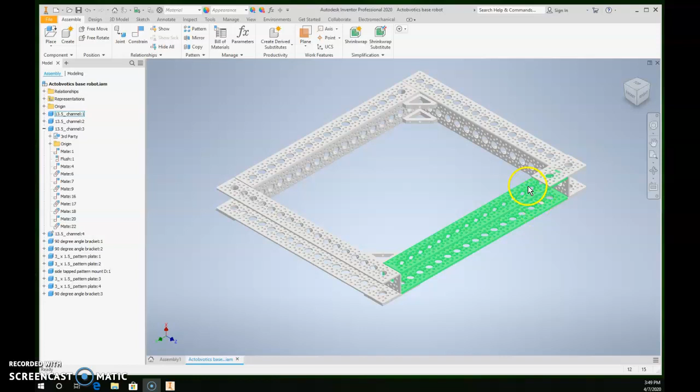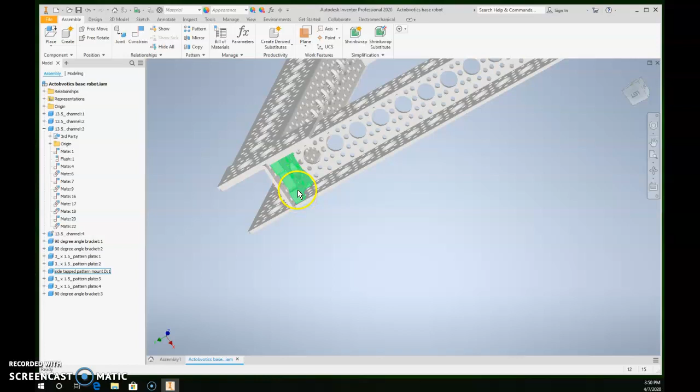Okay, so this is where we should have left our robot last time, with all the different brackets in the corners. You should have had two ways connecting each corner. For example, here I had two corner brackets. Here on this one I had two plates, a plate on top and a plate on the bottom. Over here I had a plate, and if I spin it around, I had one of those inside couplers, inside connectors, end connectors I guess. And on this side I had a plate and an angle bracket. I think I mentioned, plate and the coupler, or the end plate there. So that's the way I connected my corners. You could have done it a variety of different ways after I showed you those first couple.

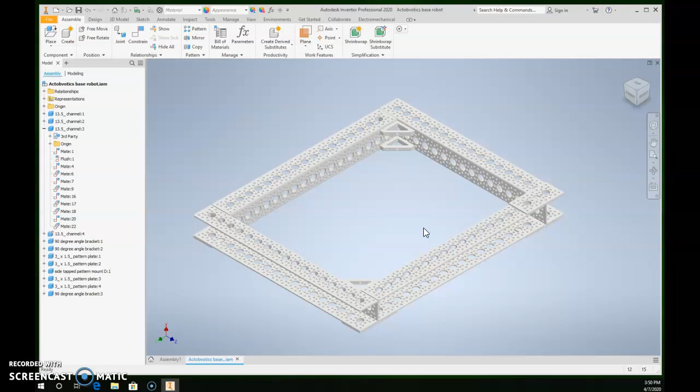All right, what we're going to do this time now is we're going to try to get some wheels on this thing. Hopefully we have time in this 15-minute video to get all of our wheels on. We'll just see what we get done.

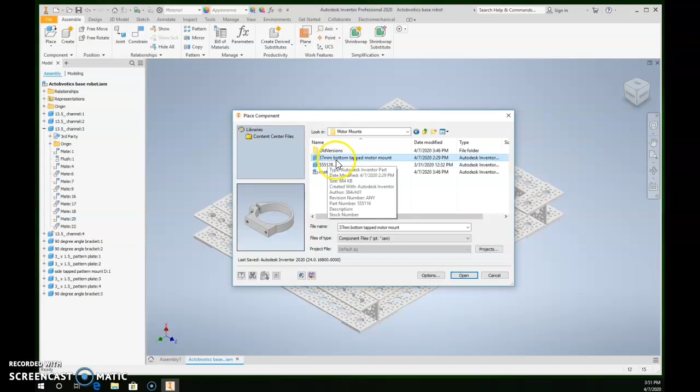So first, we're going to go to place, and under place we're first going to place some motor mounts. This robot we're going to create is going to be a two-wheel drive robot, so we're going to need some motors and some motor mounts. So we're going to go motor mounts. The motor mount we're going to use is this one, the 37mm bottom tapped motor mount. So we're going to place in two of those, one there and one there, that's fine.

While we're doing it, we're going to need some motors, so we're going to place in some motors. We're going to use the NeveRest motors, so we're going to place in two of those.

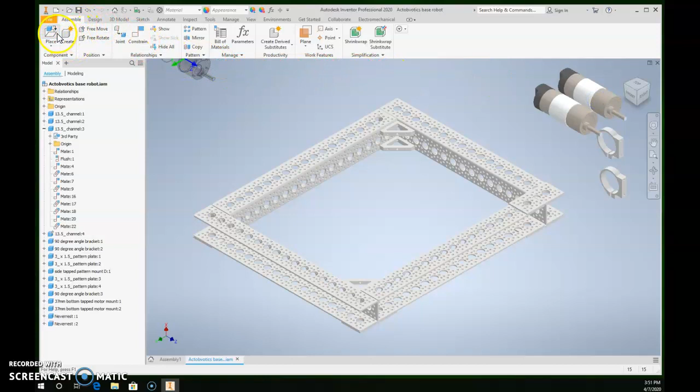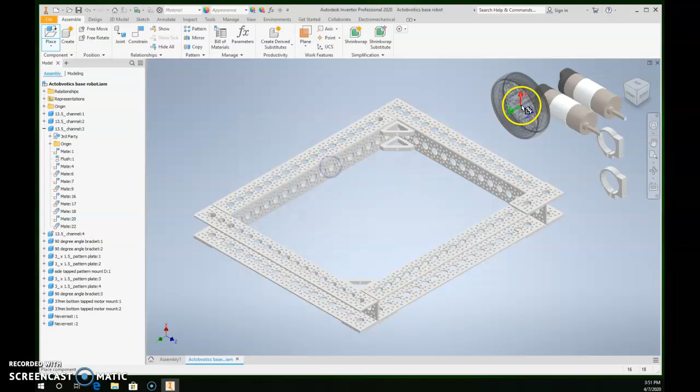While we're doing it, we also need some wheels, so we're going to go ahead and place in some wheels. I'm going to scroll down to the wheels folder. They have these two parts of the wheels you can put together, but there's also one that's already assembled together, called a sub-assembly. So we're just going to go ahead and place in this assembly, which will save you a couple steps. So we're going to go with that and place in two of those. All right, that's going to be enough to get us started at least a little bit.

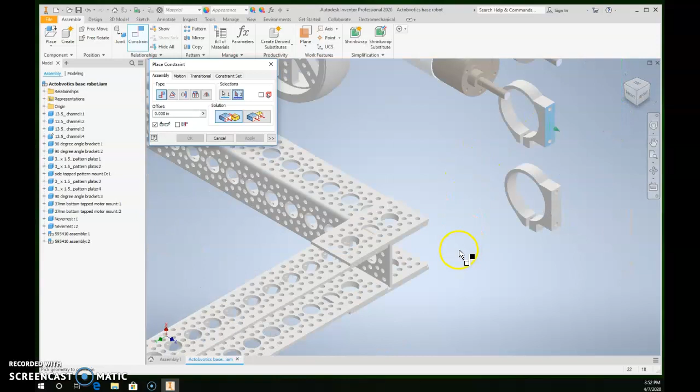So let's start putting some of these into place. First off, we're going to start with our motor mount. We're going to go constrain this bottom surface of the motor mount here. We're going to select it, and we're going to mount it on the bottom of our robot. So I'm going to flip this robot over, and now we're down here on the bottom of the robot.

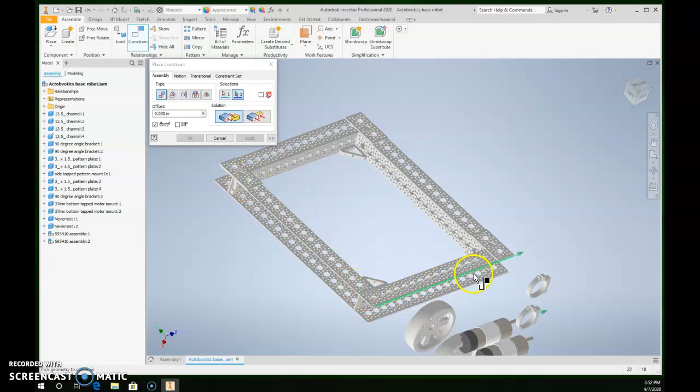Now here's where you have a decision to make. Notice the bottom of my robot. I happen to use, on three of the sides, this plate here on the bottom. We need all of our wheels to be mounted on the same surface, so mine, again, 3 out of the 4 have that plate on it. So I'm going to mount mine to a plate, my motor mount here. I do not have a plate here, so I am going to have to add a plate to this one once I get to it. So for now, though, to start, this is the motor mount I'm going to place. I'm going to place it right on top of this plate here, so it's going to go right to there, and I'm going to apply that.

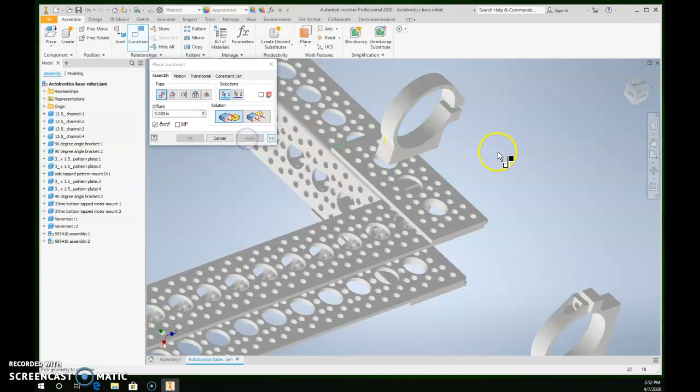Next, I'm going to move this off of that surface just a little bit, and I'm going to go ahead and constrain the center hole of that motor mount there. And I'm going to constrain it to the center line of that plate that I just mentioned I had on there. So constrain that there.

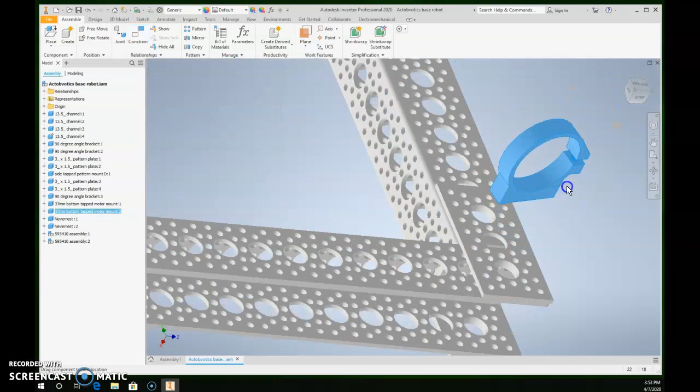So now my motor mount will rotate here. You do want to put them both the same direction - it really doesn't matter which direction you put it. Notice I have this tightening clamp here on it that holds your motor and clamps it in place. I have it in the back - this is the way I'm going to put it on this one. Or you can have it facing towards the front. However that is, but again, it has to be sitting flat on this plate.

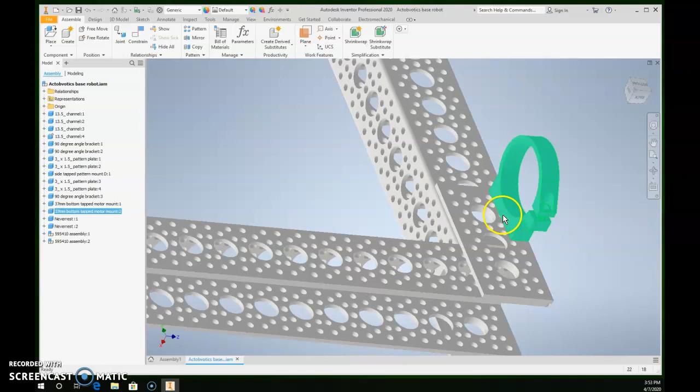Excuse me, it's not coronavirus.

Now I'm going to place this other part of the motor mount. I'm going to constrain this hole there and rotate this around, and I think it should line up with that hole. Yes, very good. So apply that. There's that motor mount put into place, and it's looking really good.

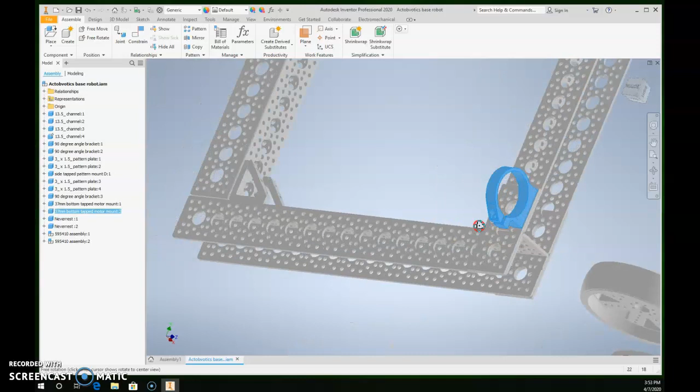As I mentioned, I decided to do even plates on all sides since I had plates on 3 out of 4 of the sides. So I'm going to add another plate here. If you decide to mount yours flat, that's okay, but if you get rid of any plates, you'll have to add in another brace, because each one of these corners has to be braced in 2 positions.

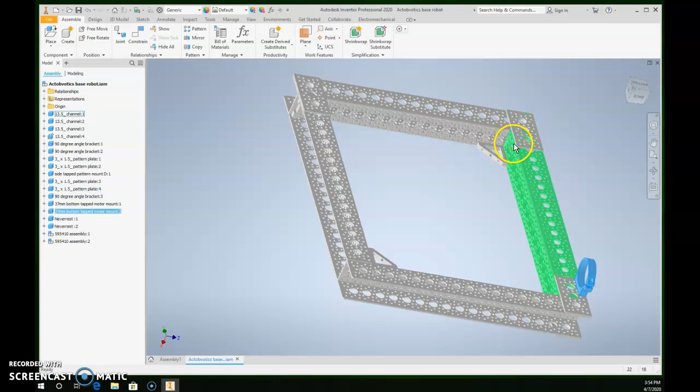I'm going to pause my video for a second and go ahead and get this other plate added here. I think you can handle that on your own.

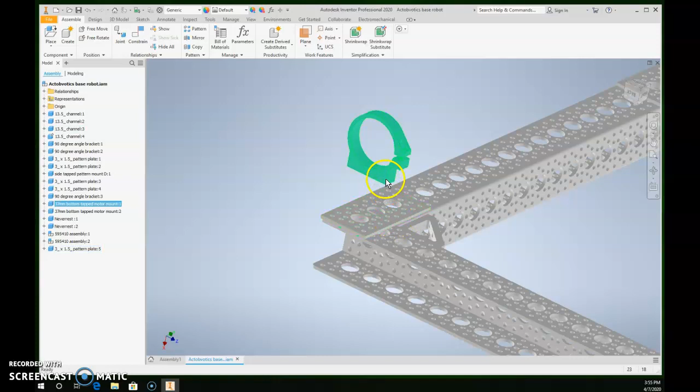So as you see, I'm on the other corner here. I went ahead and put this plate in there, just that normal little plate underneath of the brackets. I put one of those on, and I mated this to that surface. Now I'm going to finish constraining this piece.

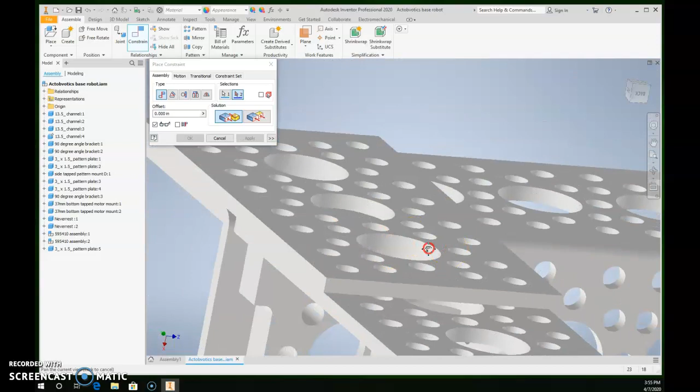I want to make it face in the same direction as this one, so the hole on this end I want to constrain towards the front. I'm going to go to the center of that hole and constrain it - oh, I spun my whole thing around - and constrain it right up here to this front hole on that plate.

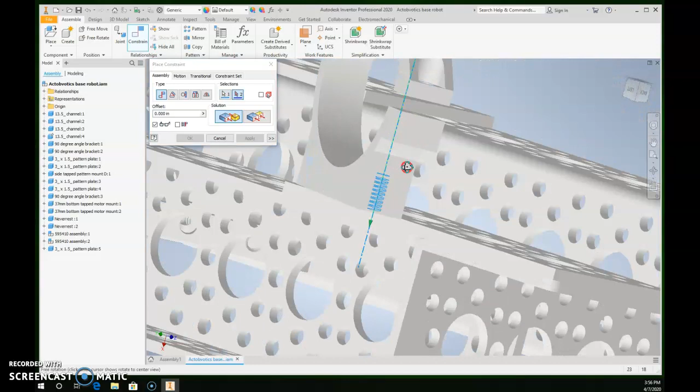Apply that. As I always do, it's easier to rotate this around so at least it's close. So I'm going to constrain here, go to the center of that hole, rotate it back around, put it right there to that hole, and apply that.

If I've done that all properly, these two little portions of it are towards the back, and that makes it look consistently the same.

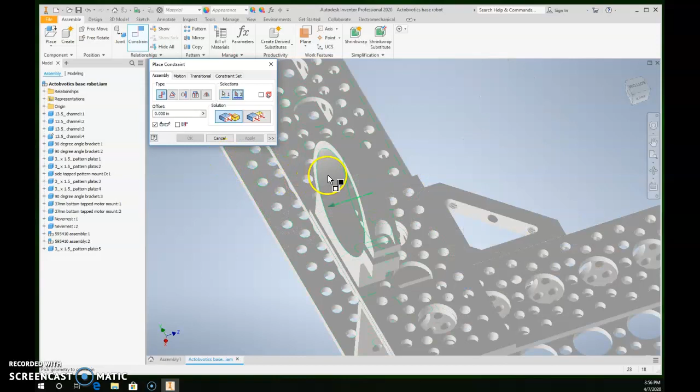Now we need to put our motors in there. I'm going to constrain, going to the center line of the motor - just click there - and then go to the motor mount and click on that surface to the center line of it, putting my motor in there.

Notice the shaft of this motor is sticking out this side. It's going to be hard to mount a wheel on the inside of it, so I need to make it go the other direction. I'll just click here, and that makes it spin the other direction. I'll go ahead and apply that.

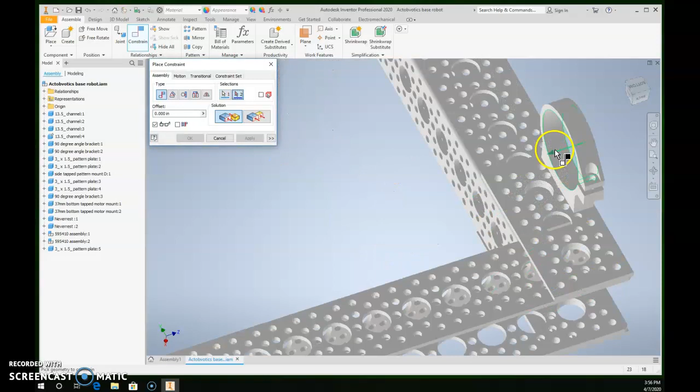I'm going to put my other motor in there, constrain this one to right there, and it's facing the right direction, so I'll go ahead and apply that.

Next, I want these motors sticking out the same, so I'm going to use flush. I'll come right to here and flush this surface of the motor with this surface of the motor mount.

However, I'm not going to leave it totally flush. Right here in this space, I'm going to use offset. I'll offset a 1/2 of an inch, so I'll go 0.5 and offset the 1/2 inch.

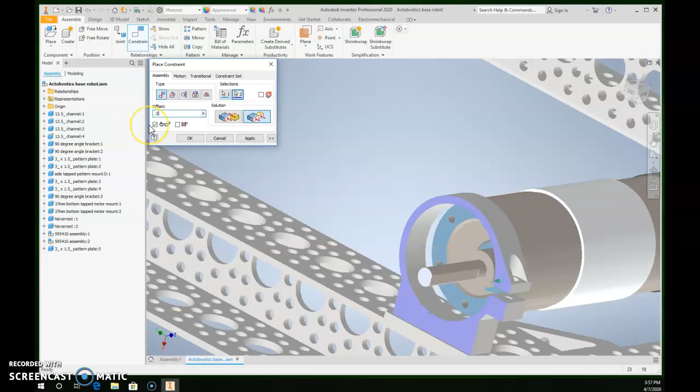Notice when I offset that 1/2 of an inch, it went in the way that I had mine selected. Yours may or may not have. If yours did go in, easy enough - you just change this to a negative, put a minus in front of that, and offset it minus 1/2 of an inch in this direction.

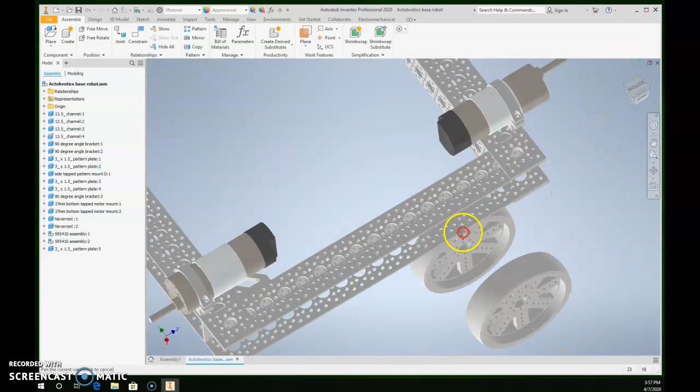I'll go ahead and go OK, and do the same thing on this other side. I'll spin around here, constrain, and flush this with this surface there. Again, I'll do it a 1/2 of an inch. It goes in again, so I'll make that minus 1/2 of an inch and go OK. So now my motor mounts and motors are both in there.

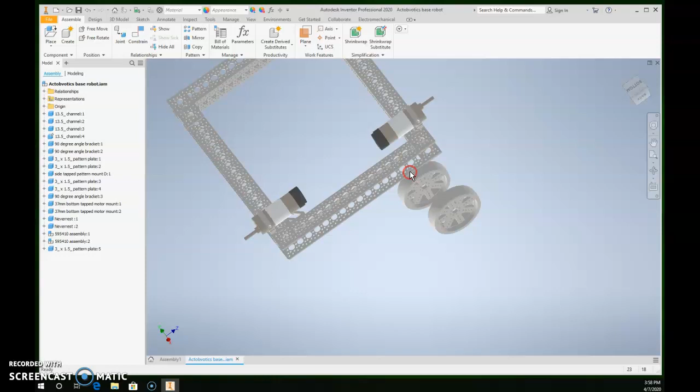Now, your motors are not fully constrained yet.

They'll still rotate around this axis, which changes the position of this shaft. We'll talk about that in a little bit, but right now I'm just going to leave them like that so they rotate. Okay, now I'm going to stick a wheel on there.

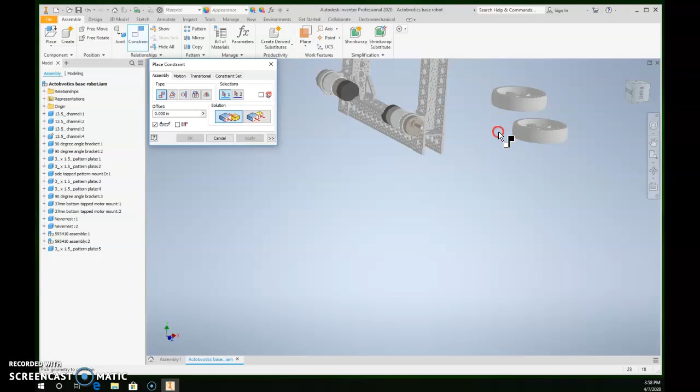I'm going to go constrain. Whoa, don't know what I just did there. Let me try that again. Go constrain, pick the center line of my wheel. I'm going to come right over there, pick the center of the wheel, and put it onto that shaft. Get the center line of the shaft right there, and apply that.

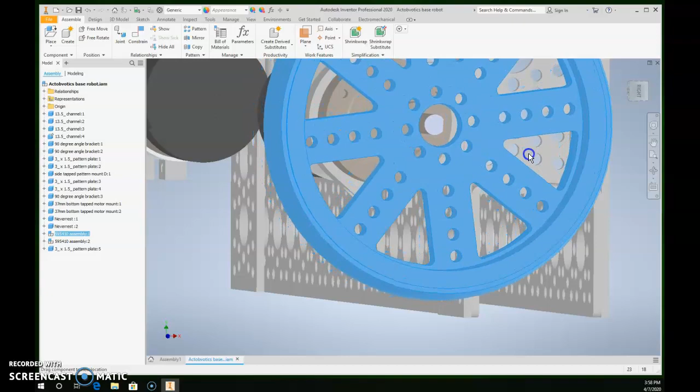Now, when you put that on there, tell me how you feel that fits on there. We'll pull it on and off here. Do you feel this hole of the shaft fits the hole of the motor or the wheel very well? It really doesn't. We need something else in there.

The thing that we need in there is a little mount, a little wheel mount. So we need to place another part. We're going to go to place. I'm going to go up a folder, and let's see.

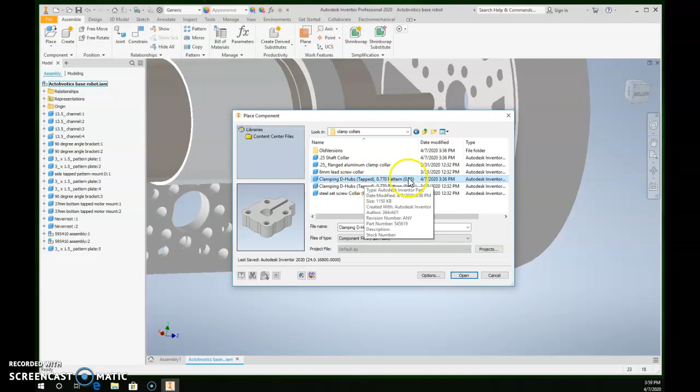I think that's under clamp collars. Yes, it is. It's under clamp collars, and it's clamping D hubs. I believe we're going to go ahead and go with the 1/4 inch one. So we're going to go with the 1/4 inch, 0.25, clamping D hub, and go open.

I'm going to place that in there, and I'm going to go ahead and put in two while I do that. Okay, so now with this, I'm going to constrain it to my wheel. I'm going to constrain the center line of it to the center line of my wheel.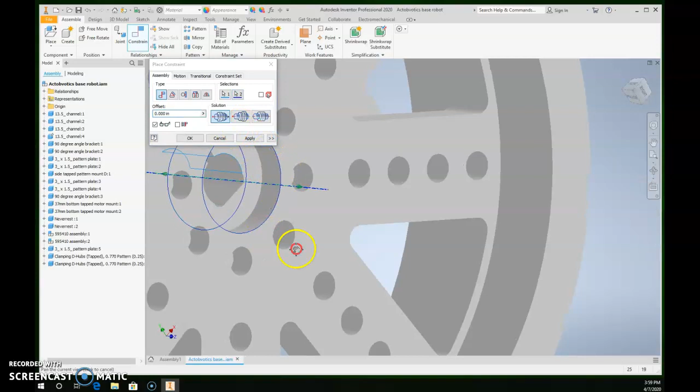Now, before I apply this, I want to look to see what I've got. All right, so it's sticking in here. This portion is actually going to stick out, but I want it sticking in just like this. This part of it is going to clamp together. I want that to be on the outside of my wheel. So it is the correct direction. All I was checking on here is so you didn't have to change this and make it face the other way. This is facing the correct way.

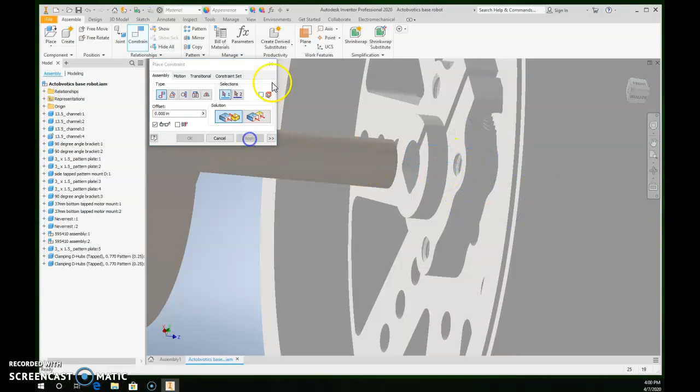So I'm going to go ahead and apply that. And now I'm going to go ahead and pull this apart a little bit so you can see what we're actually doing here. Let me see. I'm going to take this and pull it out. All right, so now, the way that this works, this little shoulder here, this cylinder, sticks inside of this hole.

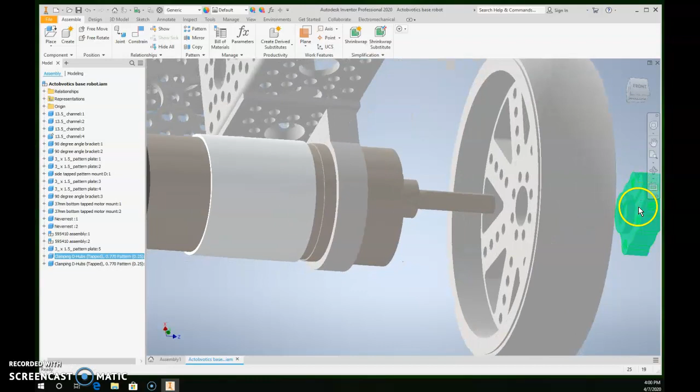And this surface gets mated to this surface. So we're going to go ahead and do that. We're going to go constrain, mate that surface to that surface of the wheel right there, and apply that.

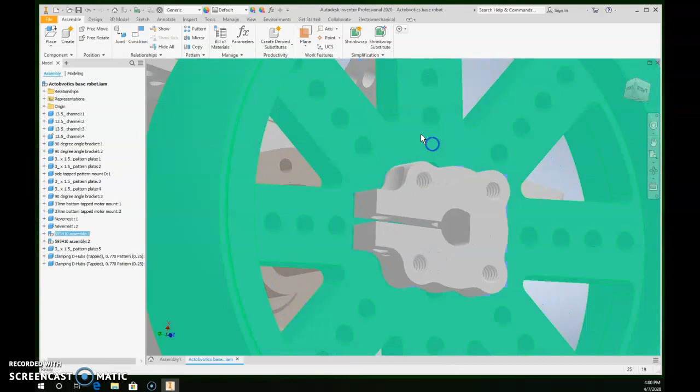Now this is a little hard to see, or a little hard to do. If I grab this piece, let me hit escape there. Everything kind of moves all at once, but notice how this piece rotates on the wheel and the wheel rotates. Everything's rotating a little bit weird there. We're going to try to lock that up a little bit now.

So what I want to do is I want to constrain the center hole or center line of this with the center line of one of those holes. So I'm going to go constrain, center line of that little wheel bracket that I just put in there to that center line there. And now we have a little bit less things that move around.

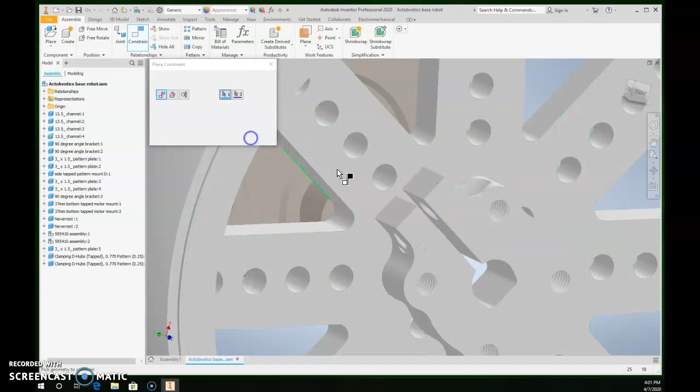We still have some, because it still moves in and out. This whole thing still rotates around and around. Kind of weird, but we're getting closer. For now, this part that rotates around and around, we're going to keep that.

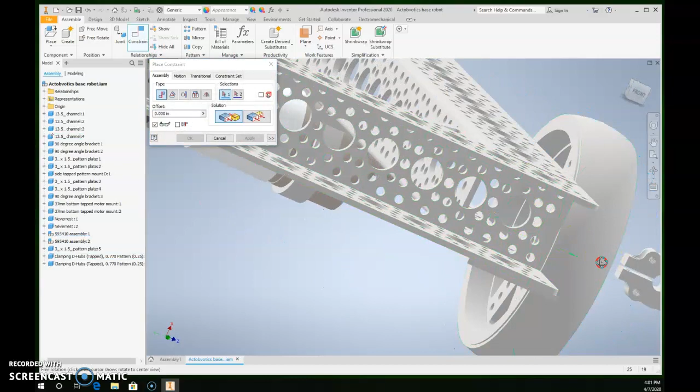What I am going to do, however, is keep this from sliding in and out. So to keep it from sliding in and out, I'm going to come in here. I'm going to constrain, and mate this surface to this surface of the motor right here. Now, on that, I don't want it to be perfectly tight, so kind of like what I did before. I'm going to try to get around here where you can see a little bit better. I don't want it to be tight there. I want it to be offset a little bit.

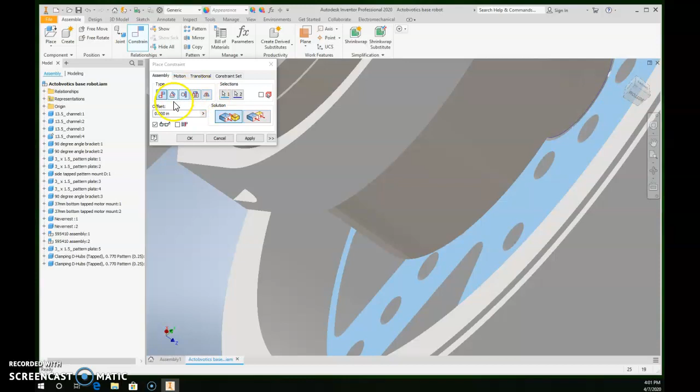I'm going to offset that a quarter of an inch. So I'm going to type 0.25 here, and that moved it out so there's a quarter inch gap in between here and here. And we're going to go ahead and just apply that. All right, that was a little bit to do there.

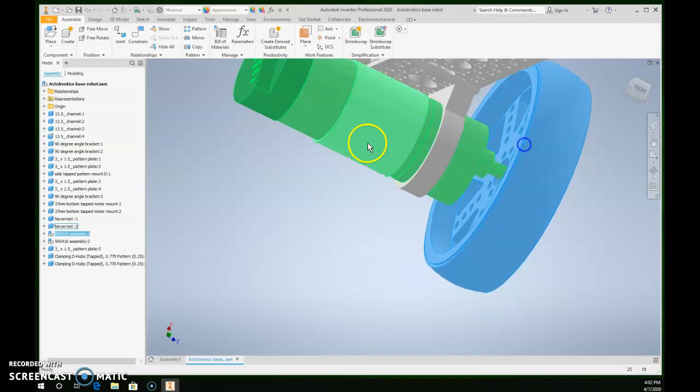I don't think you need to watch me do both sides of this though, so go ahead and do that exact same steps on the other side. Now you are still going to have it to where this whole motor rotates in here. We're going to look at what we're going to do to that here in just a little bit. All right, so I'm going to pause the video and let you do the other side.

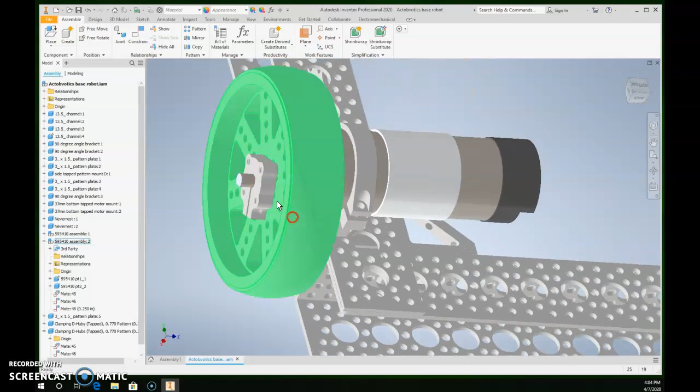Okay, so I have this other half put in here. Now the only thing I hope you remembered is this wheel here didn't set in there tight - remember we had that quarter inch offset that we did here. And this portion of the little bracket that we put in there, the clamp, goes here on the outside, so we can get to it and put this on there. If this was on the inside, it'd be very difficult to get your screw that goes in here that clamps it down to your shaft nice and tight. So that's what we've got there.

Again, this still rotates around, and we're going to mess with that here in a little bit. Now, the next thing I want you to do is we're actually going to create a sub-assembly. So what we're going to do is, much like this wheel was put together in a sub-assembly, we're going to create a sub-assembly. It'll save us some time, and I want you to see how to do that.

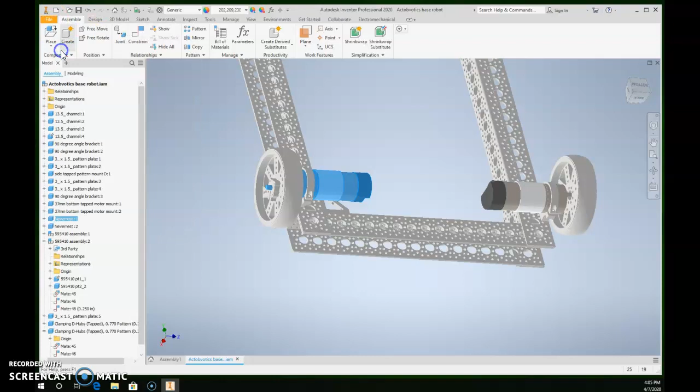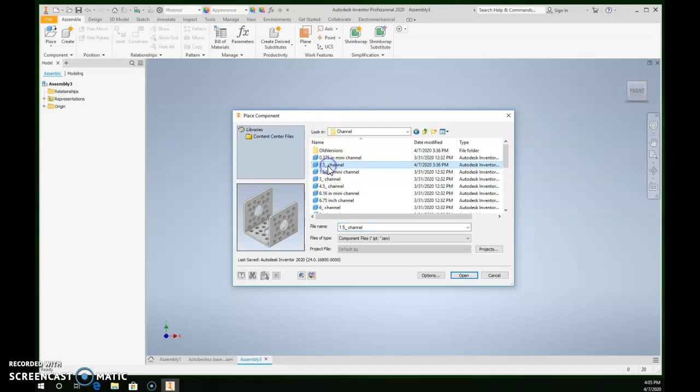So we're going to go File, New, and we're going to make a new standard IAM. For this, we're going to make an assembly for our front wheels. So we're going to go Place, and we're going to place in a channel - a 1.5 inch channel. So channel 1.5, place that in there. We're going to go ahead and go back to place.

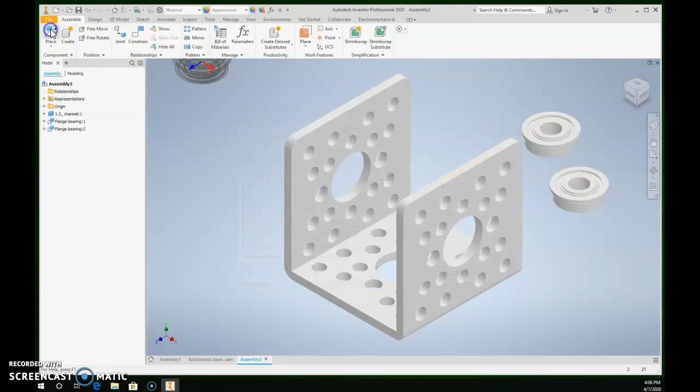We're going to place in bearings. So we're going to go to bearings, and you're going to place in 2 flange bearings - flange bearings 1 and 2. You're going to place in again, and we're going to place in a shaft. I think it's under shaft - yes, shafts. And we're going to place in a 3.5 inch shaft.

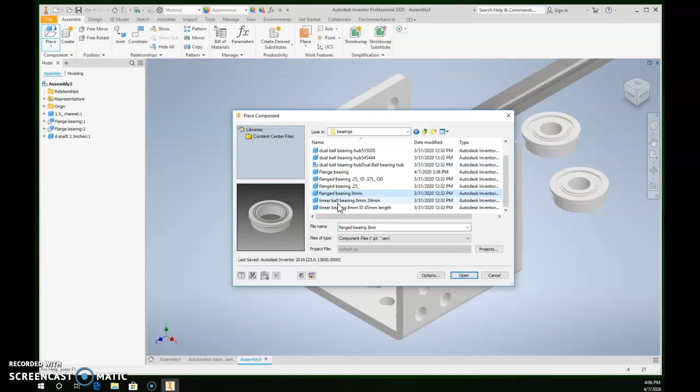And we're going to place again, and we're going to place in, I think it's under coupler. Nope, it was not under coupler. We're going to place in... I'm trying to think where it is. It might be under bearings. No, it's not under bearings. Let me pause the video and I'll show you. All right, it was under clamp collars.

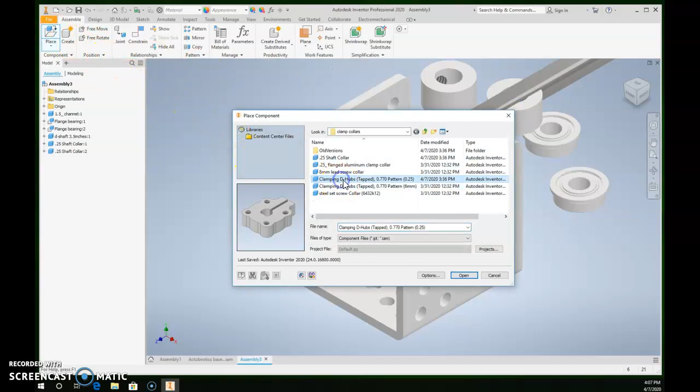Clamp collars, we're going to go to clamp collars, place those, and we're going to place in just 0.25 inch shaft collars. We're going to place in 2 of those. And then 1 more, we're going to place in that same one we had just a second ago, a D hub, the 0.25 inch. All right, so that's all the parts we need.

First thing we're going to do is we're going to take our block and we're going to ground it. And then we're going to place in a couple of the bearings. We're going to go constrain, and we're going to get our bearing center line placed right here to that center line there, and it's facing out the flange portion of it. It's a little bit hard to see there, but I'll show you.

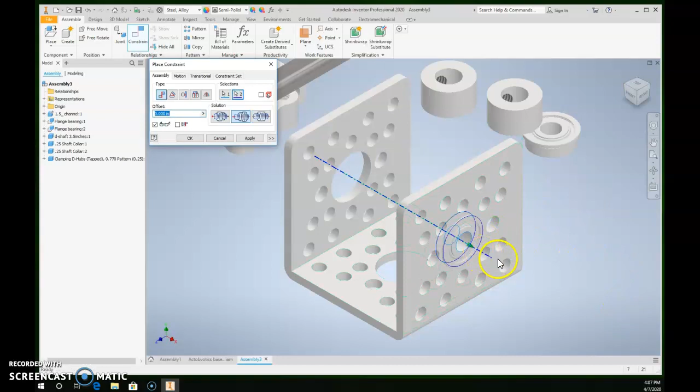We're going to pull this out a little bit like this, and we're going to go constrain and put that to that surface and apply that. So there, that one bearing's in place. We're going to get F6 - oops, if I can find my F6 - and put that in that view.

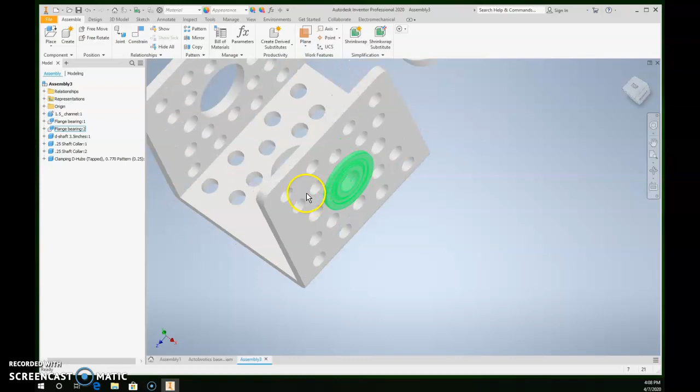Now here, what I'm going to do is go ahead and save this. Save this as front wheel sub-assembly, and I need to go back and tell you what to submit.

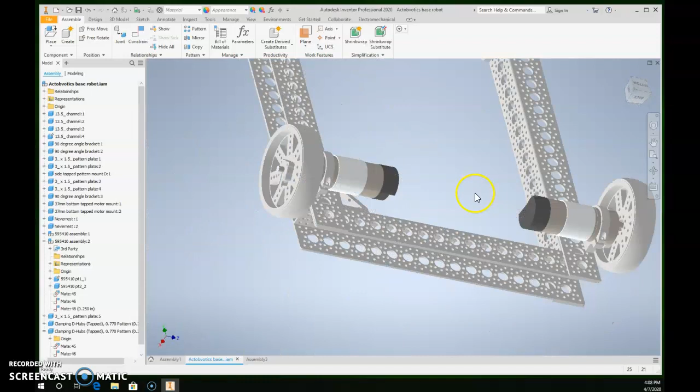So what I want you to submit for this week is one picture of the overall frame again, and then a picture of a detail of this wheel so I can see all those details there. All right, so zoom in on that.